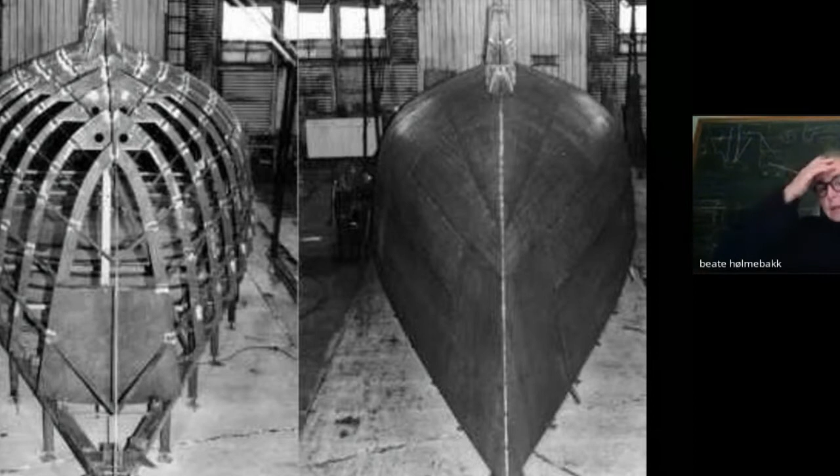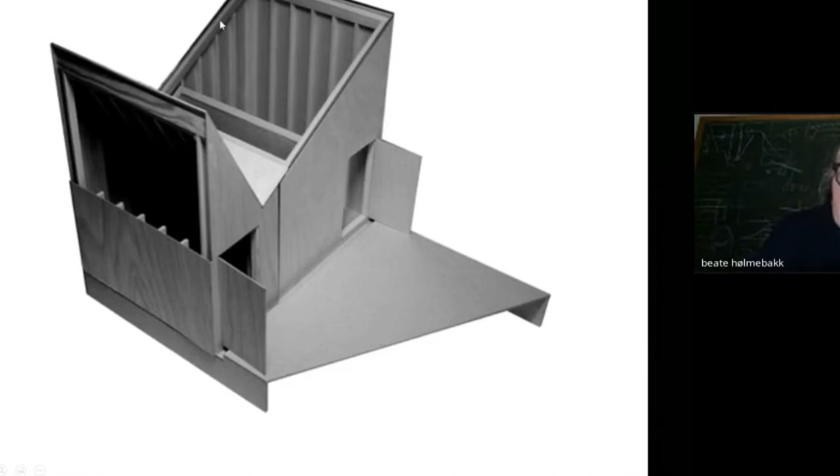We started out, as you probably saw in the sketch, with a concrete building. Then we found out there were lots of shipyards nearby, in the towns near the site. We thought we should rather make it locally and have it produced by a local shipyard, more or less like a boat structure. So we developed the concept and came up with the idea of a steel structure clad in corten steel.

It's an incredibly simple plan. It's a large toilet for handicapped people, a small service room, and a smaller toilet. And as you can see, there's a skylight and a very high set window.

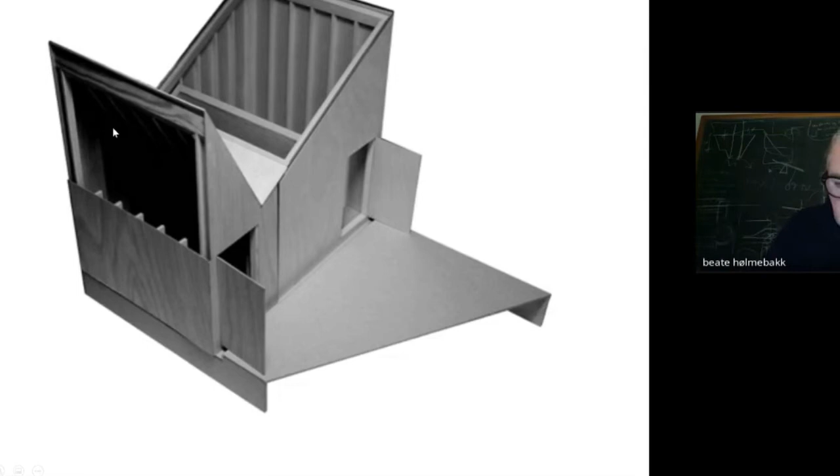Then we started to look into the steel structure and understood that actually we didn't need an interior skin. We could work with a load-bearing skin of 8 and 10 millimeter steel and only have some bracing where it was needed. This building is closed during the winter, so it really didn't need anything else but this thin steel structure.

So it was made in the shipyard. Every piece was made and then brought to the site and welded together.

We enjoyed very much working on the detail of this project. For instance, the openings - of course these could be rectangular. We needed a flange to lay the glass on, but we really wanted to form the opening so they weren't regular windows. So we started to modulate the steel into something a little different than the most obvious shapes. We designed the doors, the hinges, literally everything.

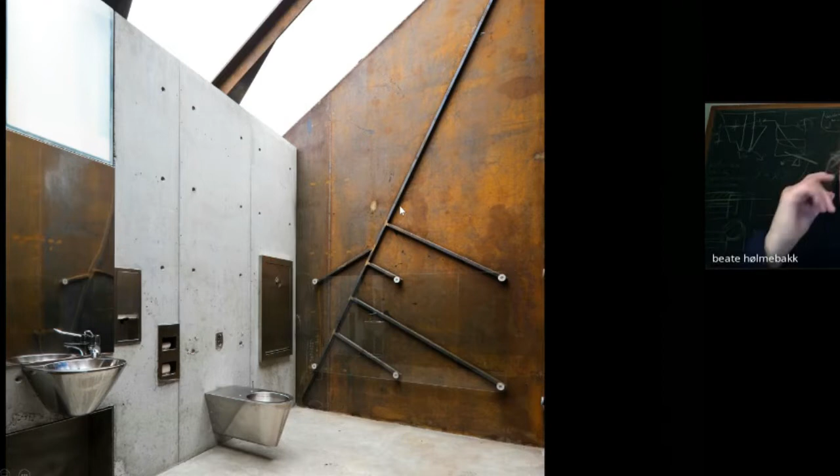I think we are an office that is very interested in details, but we are not interested in slick details. We like very much that you can see how things are produced, and that you can read from the building what the different parts or architectural elements actually do.

In the middle of the building there are two concrete walls that stabilize the structure sideways, and that is used for hanging all the equipment. This is the small toilet room.

We lined the space with clear glass so that when you were inside this building, you wouldn't get stains from the rust onto your clothes. So this clear glass is sort of a lining.

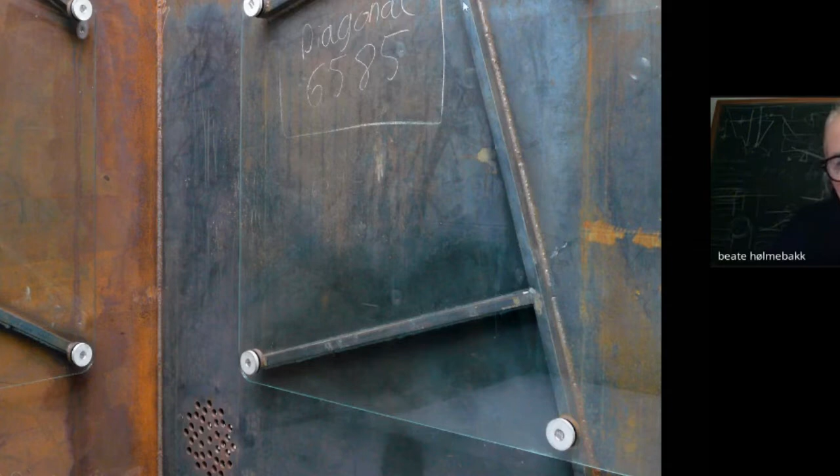Then we also saw that if you were sitting down in this space and looked straight up, if there was some glass up there, you would actually also see the horizon. So this glass became important in very many ways, both framing the notes the welders had written to each other, and also, inside this very close space, giving an impression of the horizon outside.

Another project, quite different, but also for the road ministry. This is a ferry stop. As you can see, traveling by car along the coast is a very tedious affair - you have to use a lot of ferries to get from one part of the land to the other. Especially during the summer months, when there are lots of tourists, you spend a lot of time waiting for ferries.

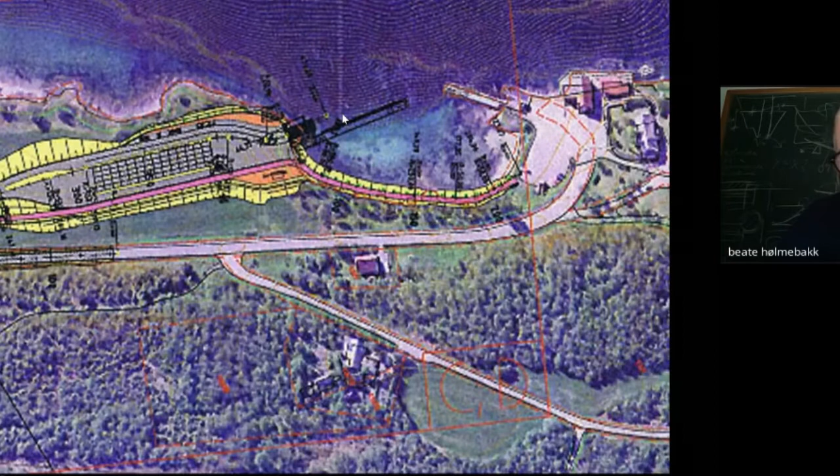Here is the plan that the road ministry made. The building shown in the former picture is a small hotel, restaurant and cafe, and they were quite dependent on getting guests from the ferry. They were worried that when the ferry stop moved to the other side of the bay, they would lose their customers.

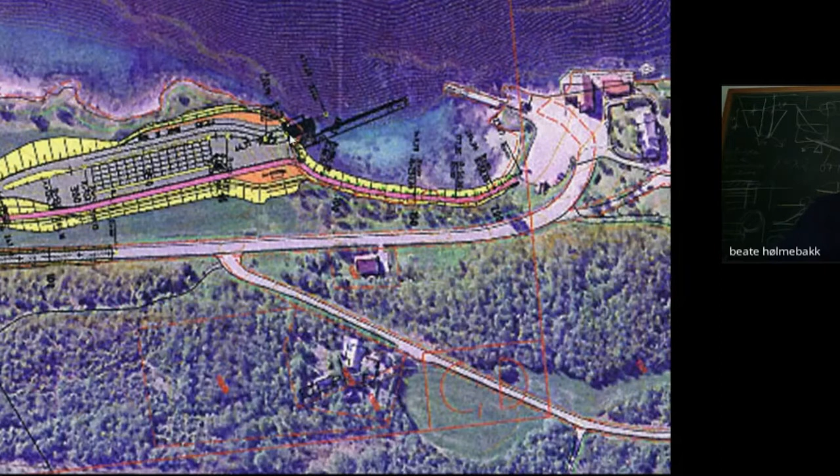We got quite worried when we saw this plan made by the road people, because it really ruined a lot of the coastal terrain. It was a very large parking space with ditches and landfills, and they blasted away some of the site to make space for a little service building.

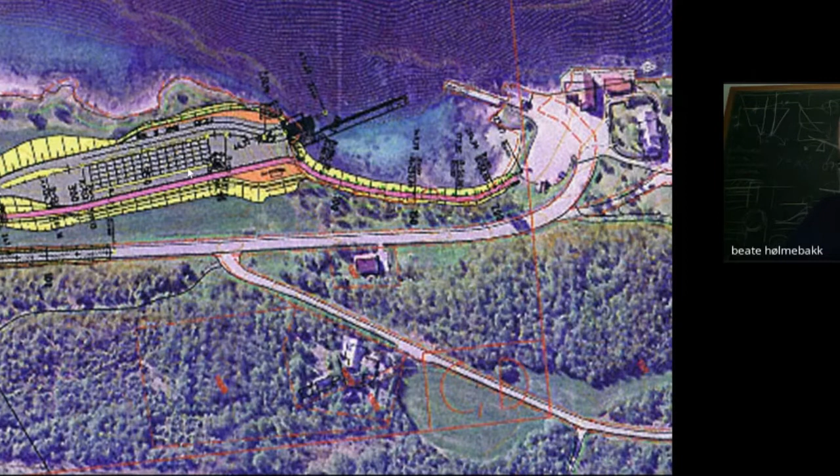Initially we were asked to design this service building, but we said we needed to make a better site plan that takes more care of the terrain. So we developed a different plan, quite a bit narrower than the original, with less dynamite and less blasting. We managed to secure some of the coastline, and also moved the service building down to the very end of the parking space.

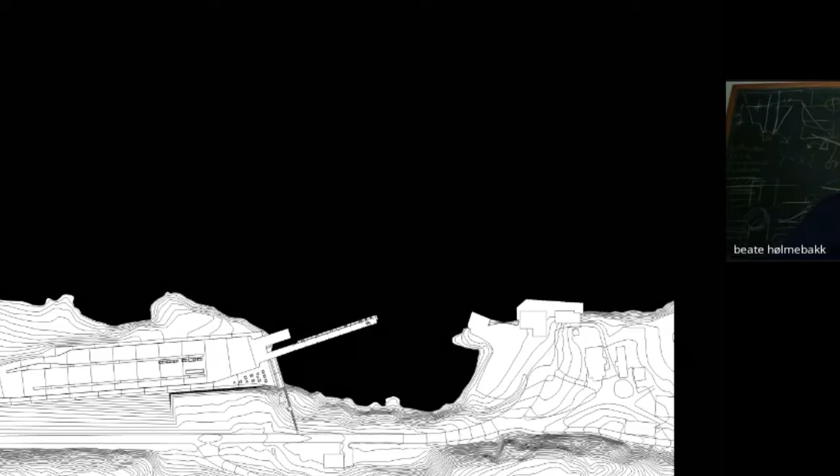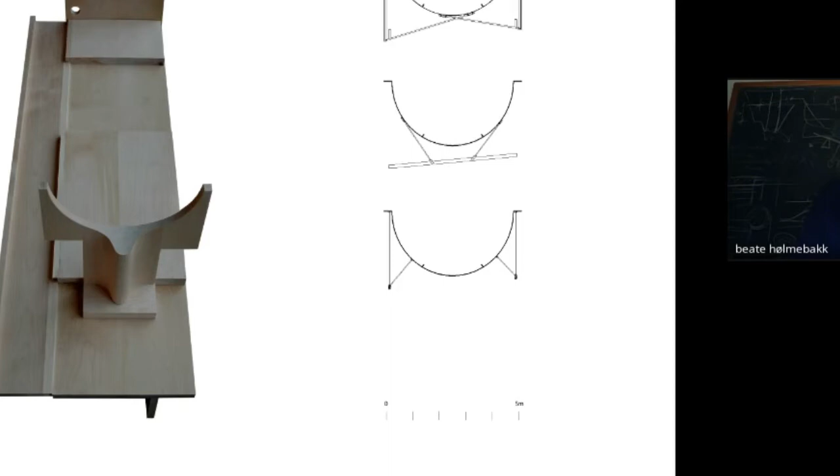What I will show now is this small building which is here. We had the idea that the building could do many things. The spatial program was simple: it should contain a kiosk, a waiting room and toilets, and also have some covered outdoor area for those waiting for the boat.

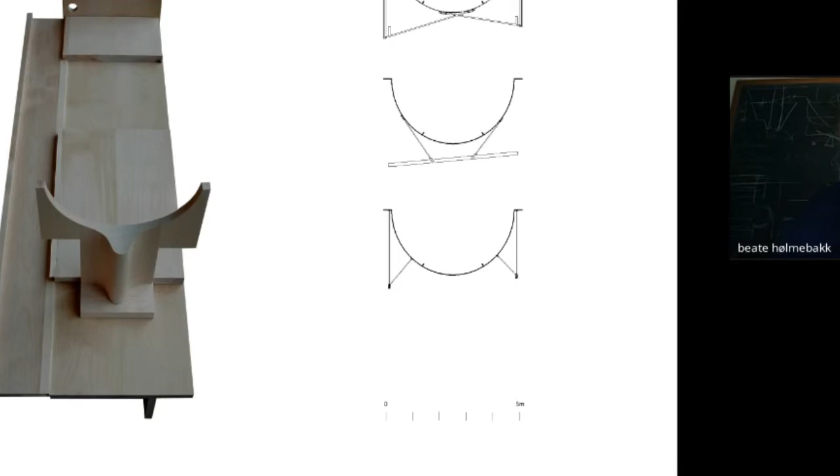This was a very big contract for the entrepreneur, but the main contract was really about groundwork - those who got the job were used to building roads and traffic systems, not buildings. We thought it was important to design a building that was mostly prefabricated and only mounted together on site, which would make it easier for the contractors.

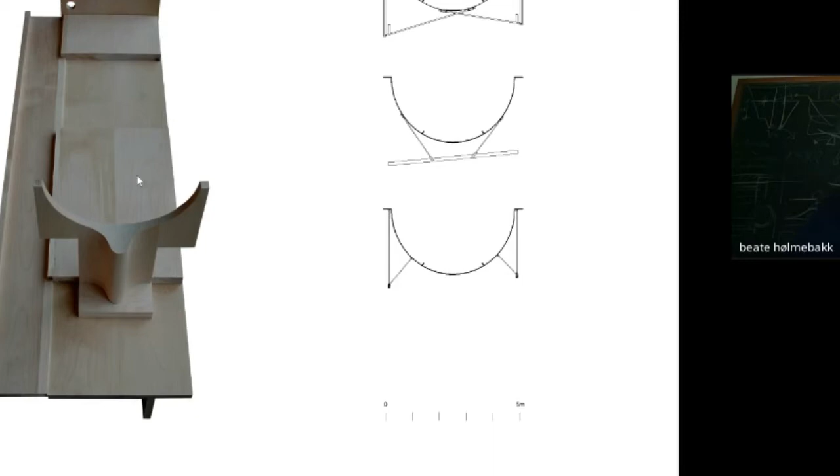So we decided to make a building with some criteria: it should be prefabricated, it should work almost as a spoiler, almost as a gate you could look through over to the cafe building on the other side of the bay, and it should somehow be relevant on the site. We had this vague idea that the structure could evoke ideas of the sea.

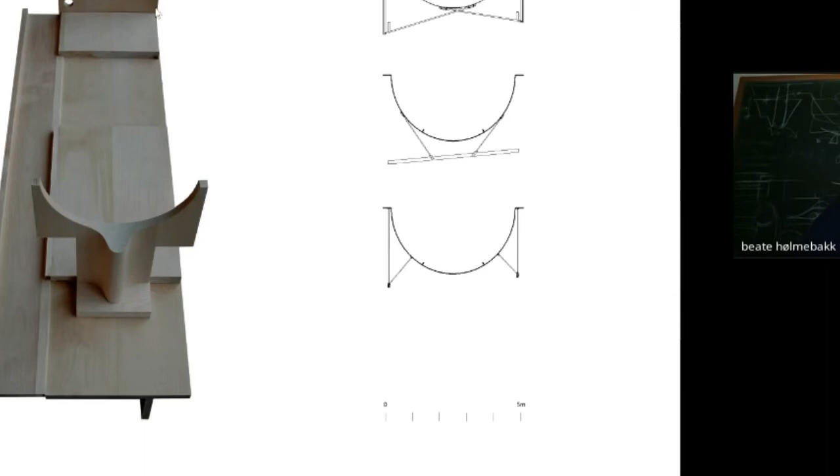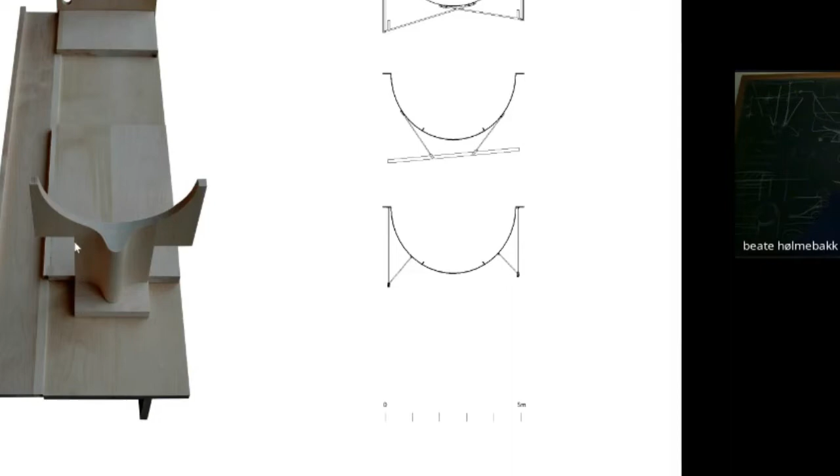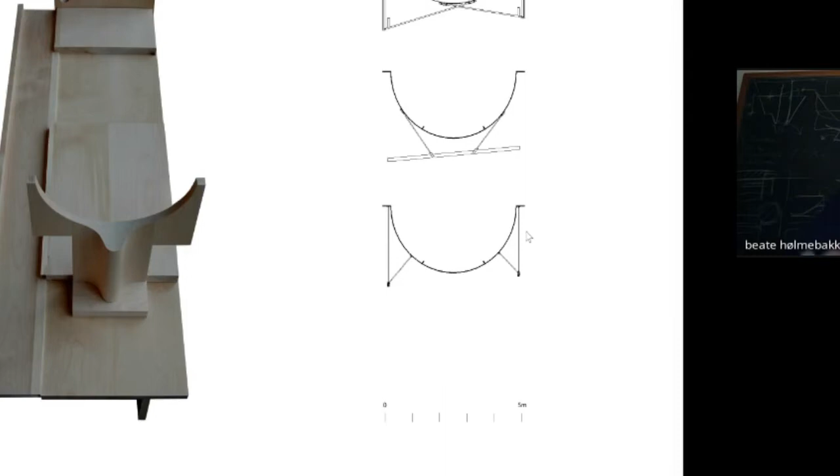We designed a building with two parts of the structure cast on site - two gable walls, one quite straight and one given a bit more mass to stabilize the structure. Onto these two walls we made an inverted steel vault that could span from one wall to the other and cantilever out to create a covered area. The main structure was this steel vault, very thin - 10 millimeters - that supported the building underneath and created a characteristic form.

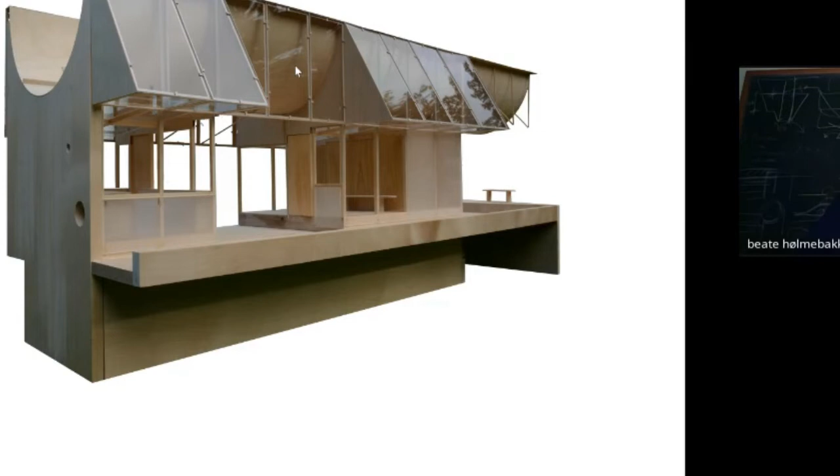Here's a model of the building. It became important to us that the building was transparent, so you could see through it, not only across the bay but also onto every part of the building. We were quite fascinated by this large belly hanging over every room, and we wanted it to be seen from every room.

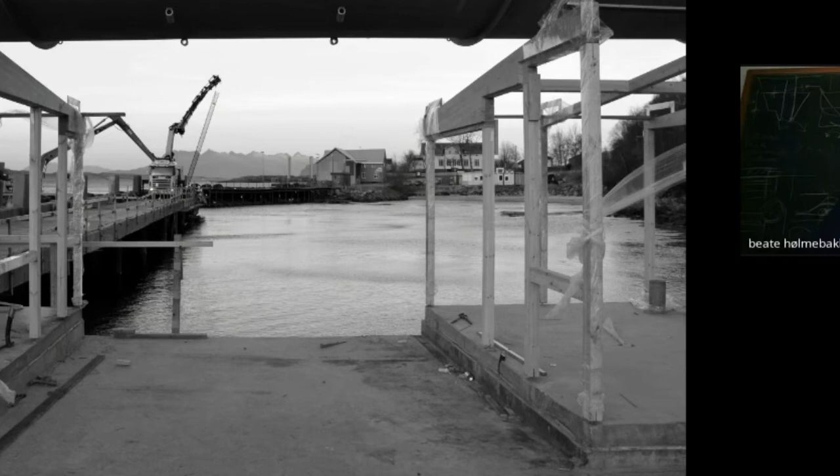Much of the project had to do with solving the details for making a transparent building. What the vault did was also stabilize a quite slender wooden structure underneath, which was then covered in insulated glass, so that these spaces underneath were warm throughout the year.

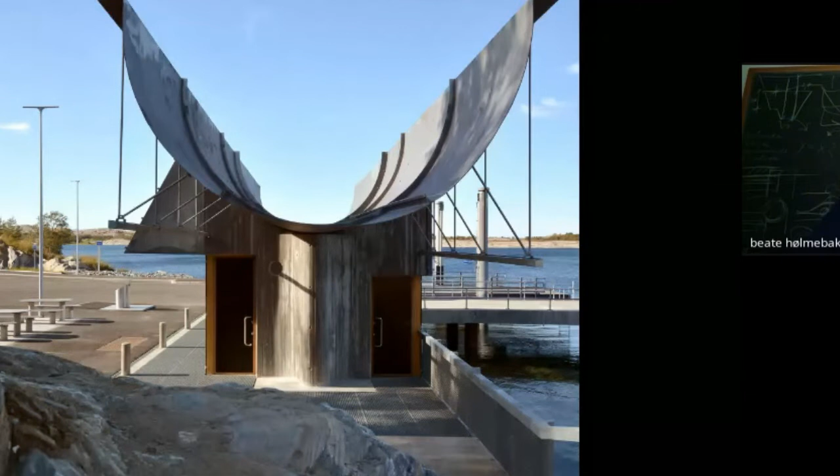Here's an image of the final project. You can see this idea of looking through, seeing everything and reflecting the site is a strong characteristic of the building. We also used this vault as a sort of armature that reflected the light during the long dark nights characteristic of the northern part of Norway.

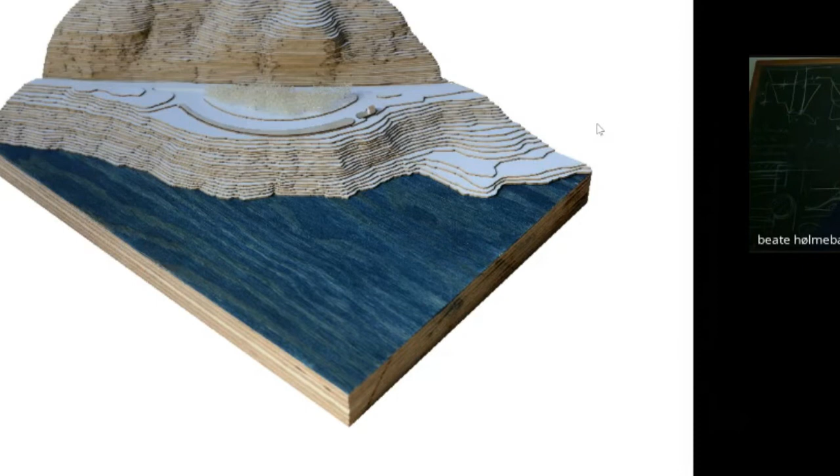There was a big landfill, waste material from the road construction, and on top of that landfill there was an old rest area in quite bad shape, which we were asked to transform. Here you see a small model of the site. We suggested making a platform from where you could look onto the large sound, and where you could sit down and drink your coffee or eat your meal. It was sheltered from the road by this planted area.

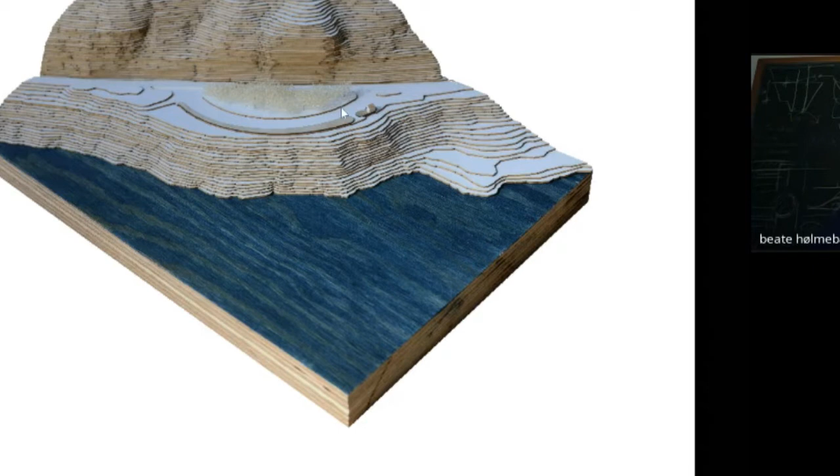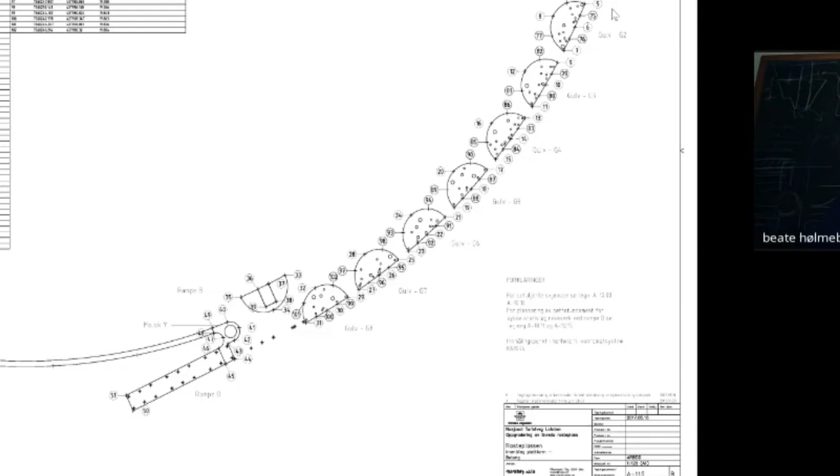What you see here, what is white is actually asphalt, and what is black is either steel or concrete. Here you see the foundations of what became the most important part of the project, and that was the furniture, where you were going to sit down and drink your coffee. You recognize the form of the platform, so these are concrete foundations for different kinds of furniture. I will get back to that.

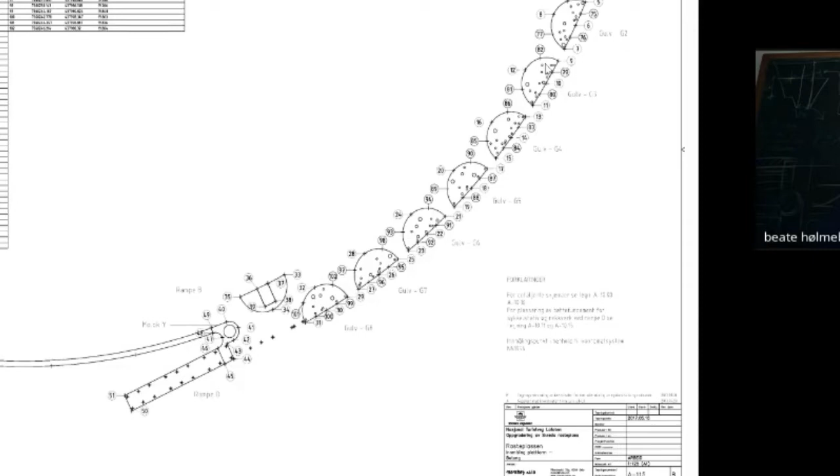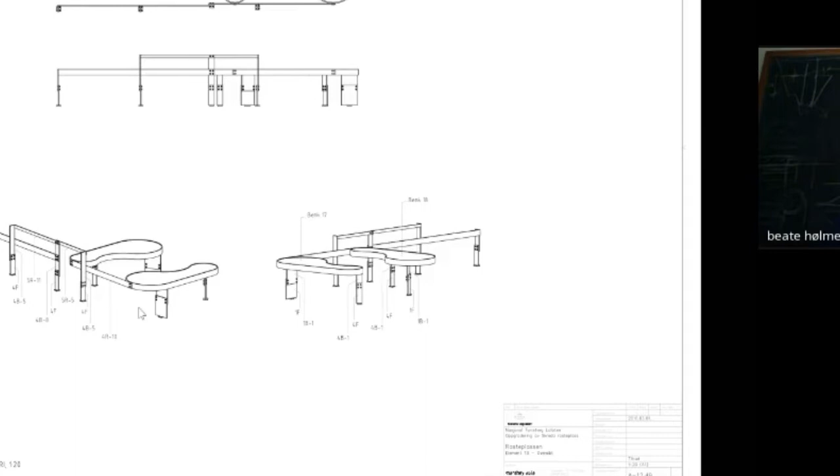We spent some time developing this furniture. It was important for us that it could be made from standard flat steel that just could be formed and given different shapes. And it was also important to us that the furniture and the railing, which was necessary for preventing people from falling into the water, should be one constructive system. That meant one couldn't remove the furniture without reducing the capacity of the railing, and vice versa.

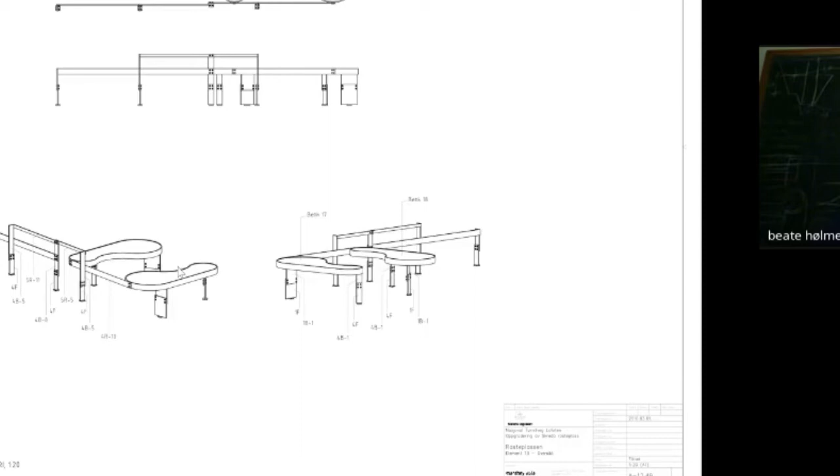So we developed several of these forms that were both benches and tables. And then we started to work with how these pieces of furniture could be given character, and how they could be covered with something that was not steel, because steel is of course quite cold to sit on.

So we had this idea of making steel troughs that could be filled with polyurethane, and given different colors. We started to look at the structure and the relationship between the railing and the furniture, and decided that each piece of furniture should only have two legs, with the last leg in the railing. So this is a small table, two legs and the last one. A large bench, two legs and the last one.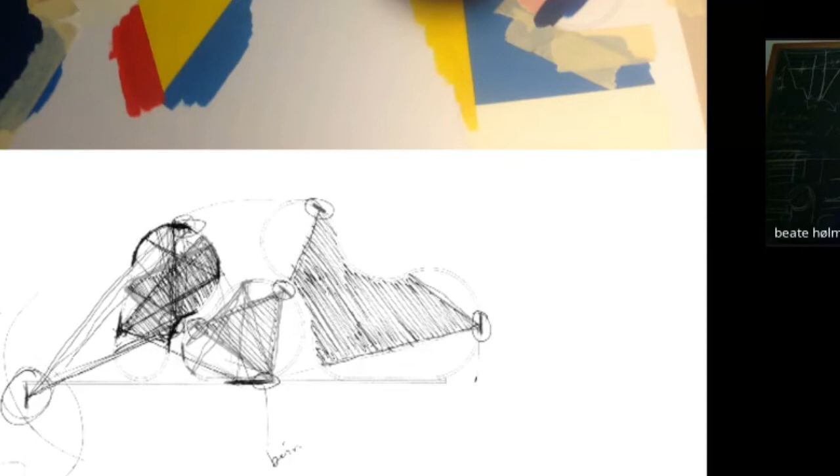Then we started to draw lines between the legs or the constructive parts, and we started to see a very interesting pattern emerging, developed between the relationship between the straight triangular lines of the supportive legs and the curved form of the furniture pieces. So we made models of these forms, and spent some time choosing colors.

So these are the semaphore colors, the colors used in a marine signal system. Here are I think 32 different benches and tables that have these patterns in these colors, and it's all generated from the idea of the relationship between the structure of the railing and the structure of the tables.

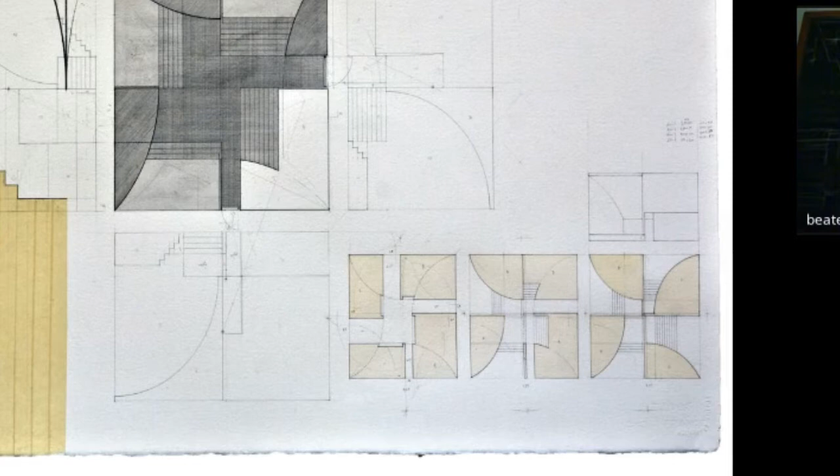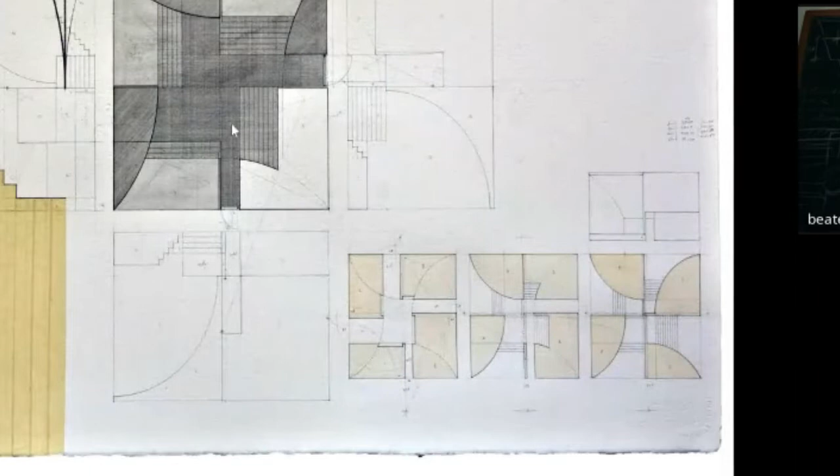So I'll go quickly through these 5 small projects. This is the first Icelandic one, building from G, and we believed that he must have been dreaming of fear and of freedom, and must have had a need to be in control. So we had this idea of a centralized space with 4 lookout platforms and a very sheltered space in the middle, with four escape routes in the 4 cardinal directions.

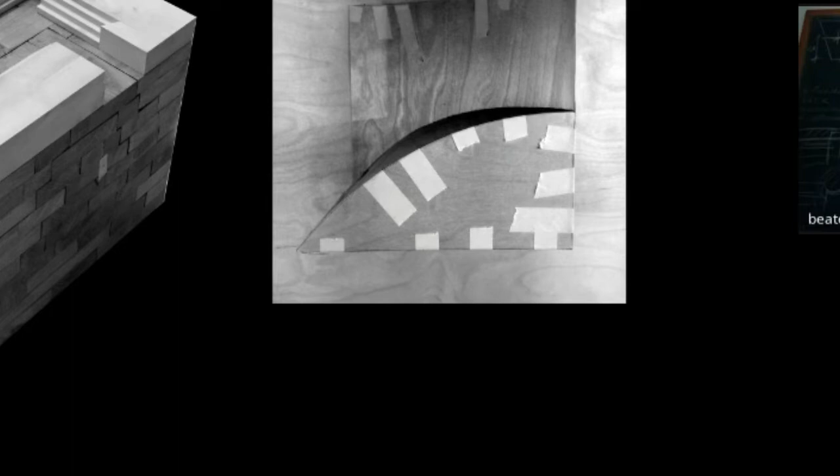So here is the site, 1 alin, the old Icelandic measurement. The model, the base of the model, where you see the escape routes, the platforms, this sheltered space in the middle, and these covered platforms.

Then it's building from M, the Irish cook. She was never sick herself, so she must have been dreaming of normality. And we guessed she must have had a concern about surface, because one could not see that she was a carrier of a deadly disease.

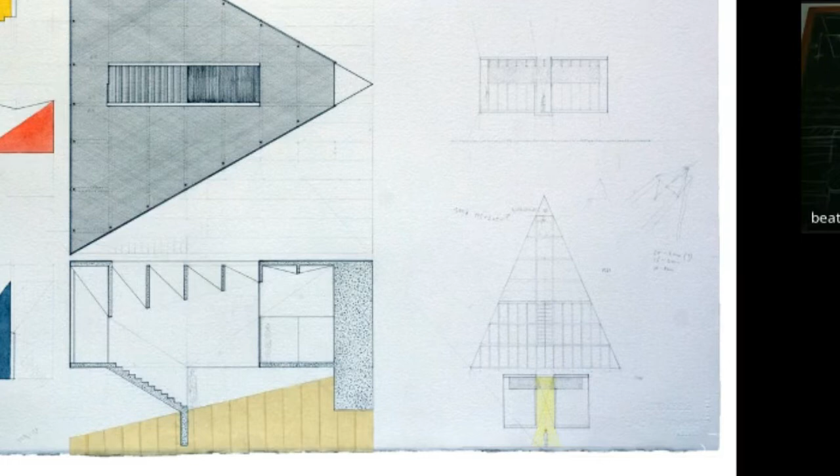So we had this idea of a structure which was all about establishing a horizontal plane on a tilted site. I will not go very much into each project, there's no time for that, but here we also started to work with color in order to think about surface appearance.

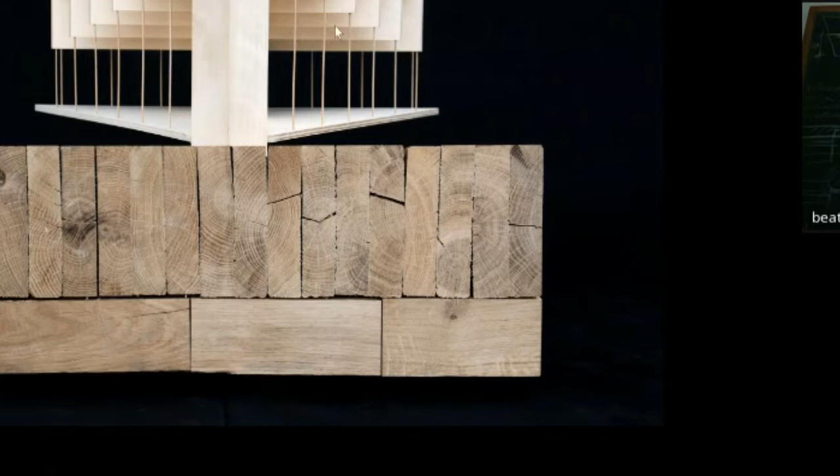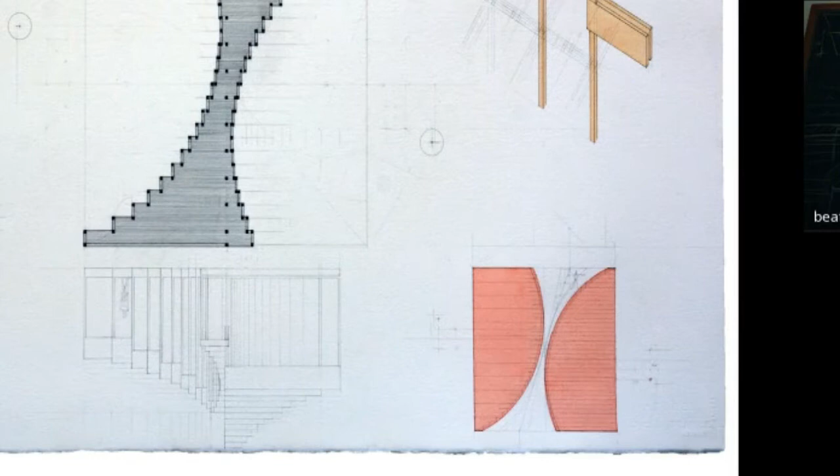Then it was building from P, Piotr Kamishevsky. We knew that when he was released, he was more than 90 years old, very, very old. He decided to stay on in the cell and stayed there for 5 years until he died. He had become a very religious man, and we believed he must have dreamt of friction, and also had a feeling of gratefulness.

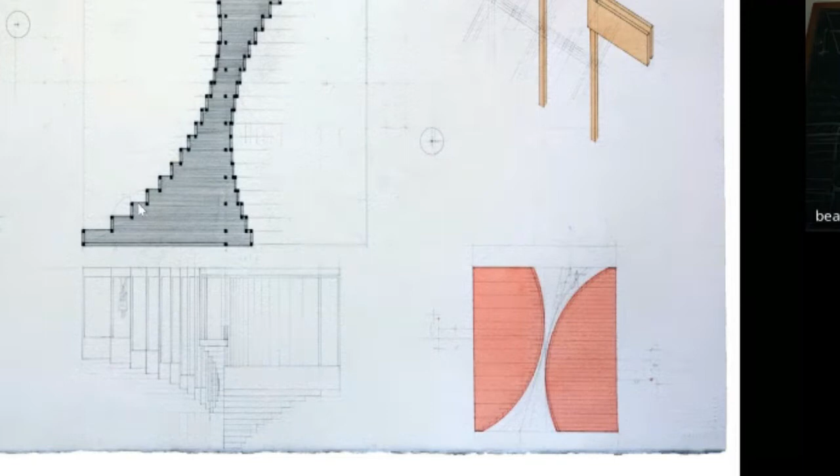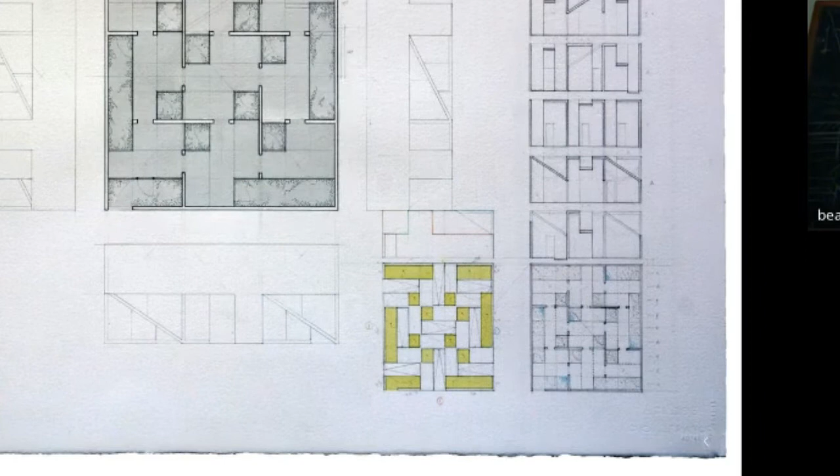Then it was building from J, the Native American. We think there must have been dreams of inclusion and persistence. The idea was to create a structure consisting of several spaces, based on the idea that the building itself could be a comfort to someone missing the company of the rest of the tribe. The site measures 1 cubit squared, some images, and then this very simple geometric structure, which creates quite complex spatiality inside.

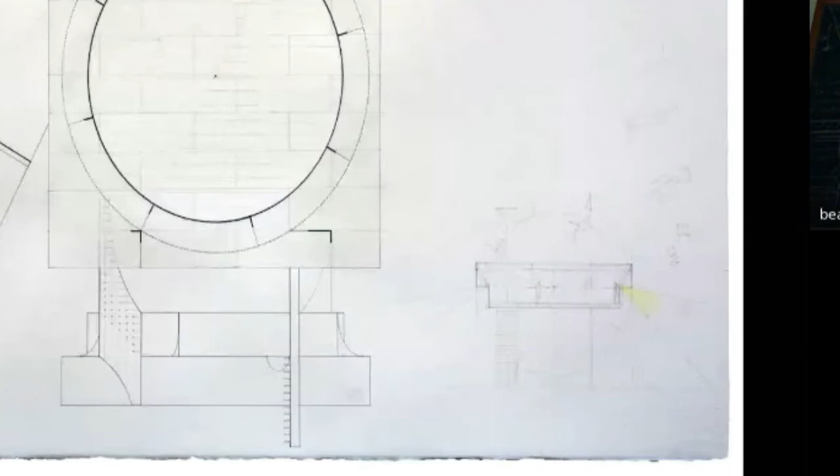And then the last one, building from L, the Dutch sailor. We believe there must have been dreams of acceptance, understanding his situation, and the yearning to surrender. The site, we never decided whether it was on land or in the water. The project is a large circular space from where you can look out in all directions. You enter the space by climbing up one of the legs, and then continue up towards the roof. This is a model photo from the interior, showing the ladder coming up and continuing up towards the roof.

The roof is a large translucent membrane, and the idea is that you can walk out onto this soft membrane and end there. Okay, back to reality. This is a house which was just finished this summer.

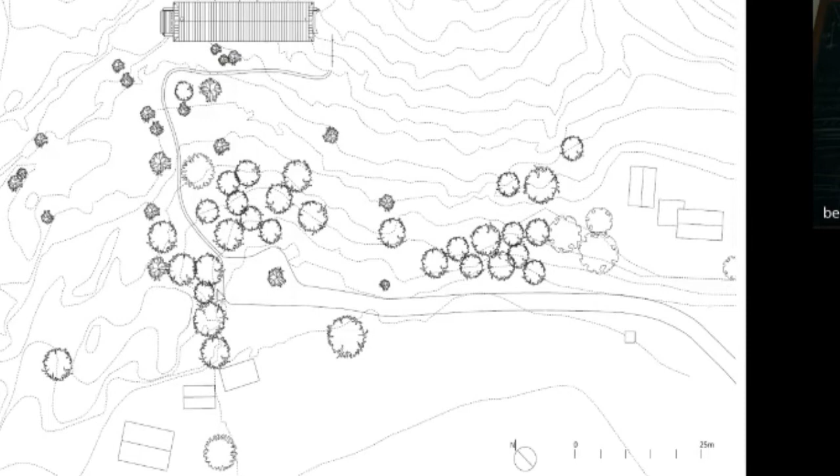It's not in Norway, it's in Sweden, a little ways outside the Norwegian border. It is a large natural site, quite beautiful, with a lot of visible bedrock. So many people would probably say it's not a very pleasant or inviting site.

We think it's absolutely beautiful, but it's hard to move from floor to floor. These bedrock plateaus make quite usable outdoor floors, but it's hard to walk from one place to another. So we decided the best thing would be to build a building that spans from one plateau to another, connecting these parts of the site. By building a bridge, one could also have a construction site without ruining any of the existing terrain.

The normal thing to do, at least where I am, is to move in with dynamite or landfills or large machines that result in very big changes to existing qualities. We tend to think that when you have a commission, the site is maybe the most important resource you have to deal with—more important than the client's budget or the program—and it's really about the existing conditions and how we as architects manage to make use of and enhance these qualities that are important for the result.

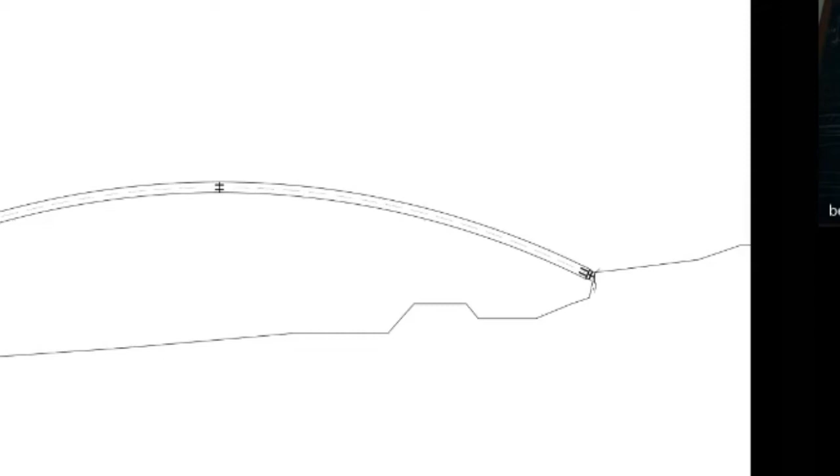We understood early that it had to be a timber structure, because timber was the only thing light enough to be carried or transported to the site. The span is 29.7 meters, quite a long span. Here are the two arches that carry the whole house. Each of the 4 foot points are different, and the whole point with the surveyor was to get complete control over these points.

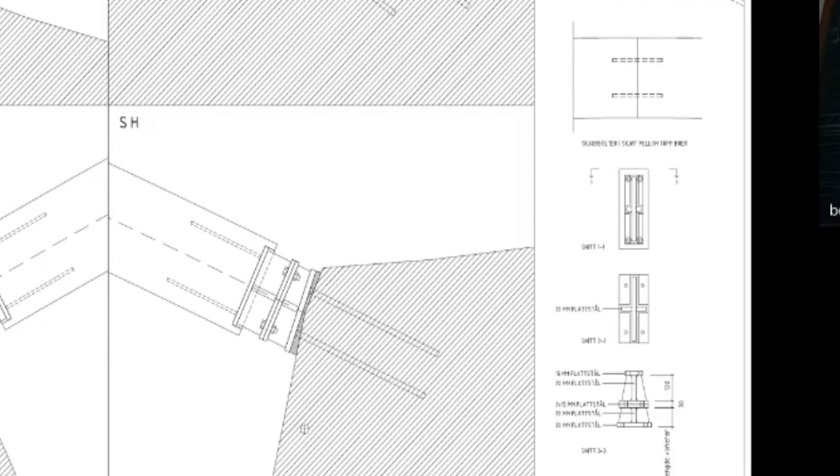What we started with, after having control, was to drill holes in the existing granite, and holes made specifically for each of these 4 stainless steel brackets that were to be bolted onto the terrain. In order to do this right, we had to test with more handy material, like wood, to make sure we had complete control over these 4 points.

Because when these arches were coming, they were being transported in by helicopter. They had to be lifted down onto these brackets, and the fit had to be perfect. There was no possibility to change anything when this was going to happen.

So here is the section of the house where you see the house, and you see the arch that runs through the house and how it lands on these 4 points.

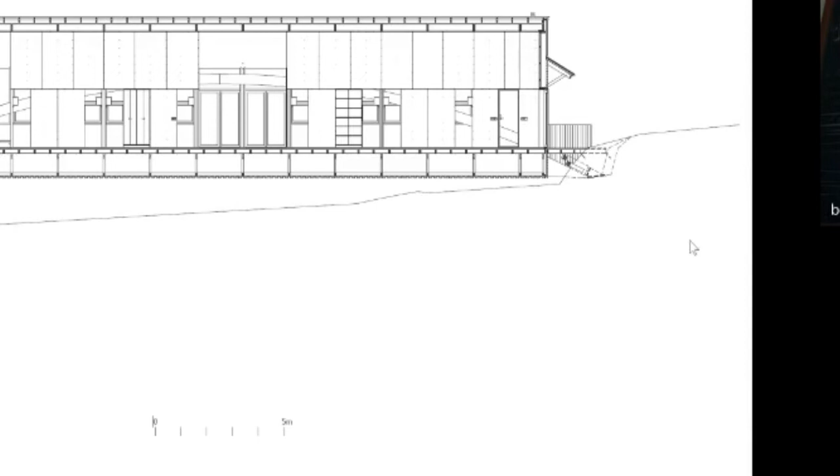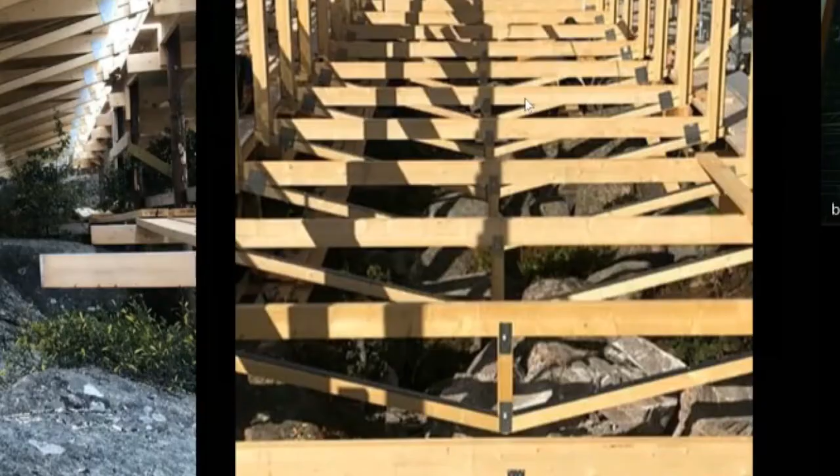Here you see the transport; each arch came in 2 parts, and each part fitted quite well onto the brackets. You see the underside of the building. The structure is such that there are hanging pillars mounted on the outside of each arch, and these trusses span between each pillar, creating this sort of keel-like underside of the house.

Here's another cross section where you see the bracing of the structure. There are of course lots of wind loads here, so the building had to be connected to the rock in the back to take both suction forces and pressure.

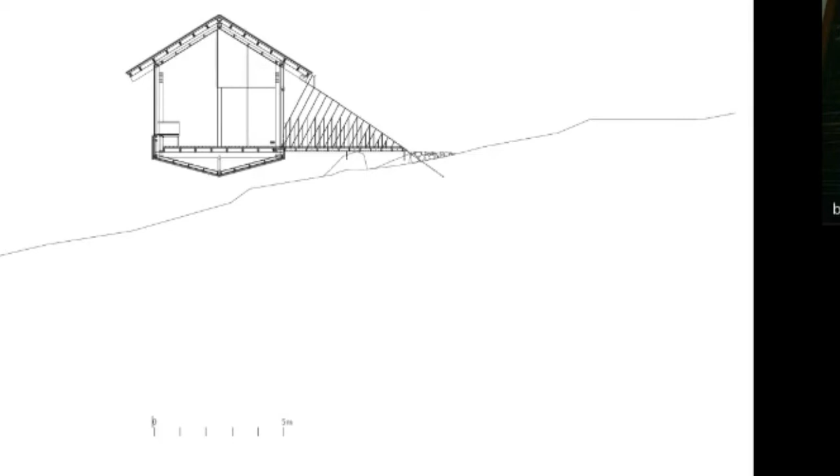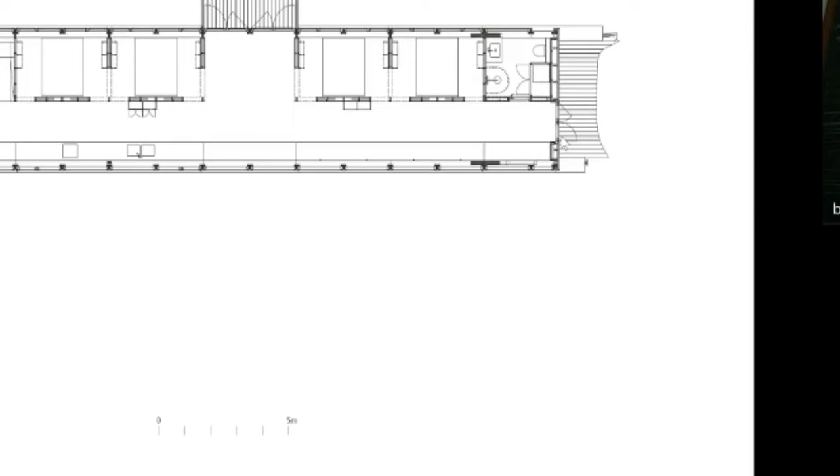Here you see the plan of the building. It's a very long interior space, 25 meters, with a central dining area, a living room, and 4 bedrooms, and then these connections to the different parts of the site.

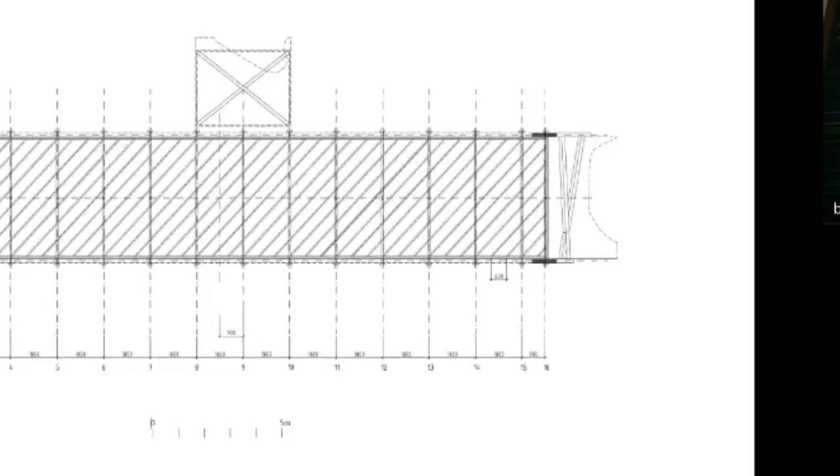It's hard to build in the air. The most logical thing is always to make a foundation and build upwards from there. Building something that's actually hanging in the air is more challenging, especially when it comes to stabilization. So this solution required some interesting geometries that made for interesting details when it came to building physics and static solutions.

Then to the last project. It is not finished yet, it's an ongoing project. It's a public commission for a national memorial at a place called Utøykaia.

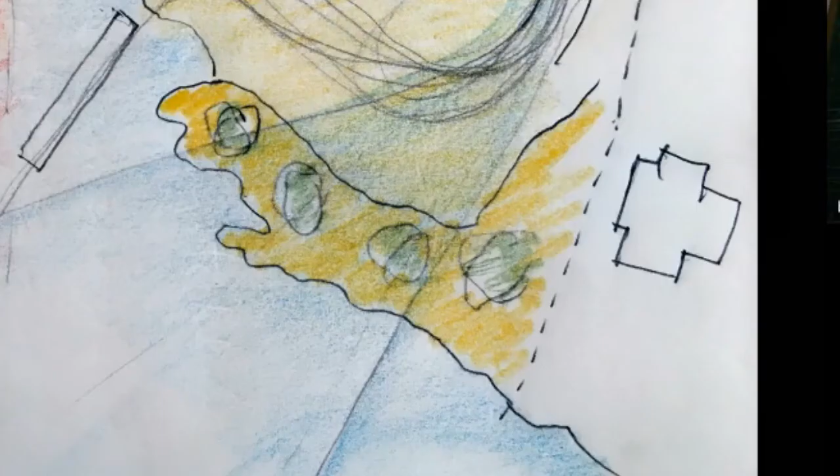It's a special area, where the neighbors do not want to be reminded of the incident, and where the neighbors are not so fond of the political activities out on the island. One thing that causes irritation is that buses transporting kids to the island stop on the road here and block it for the people living there.

One of our first sketches was a new entrance road, which would take you down to the level of the water at this end of the site, so that the end where the memorial was going to be could be much calmer, somehow the last moment on the site. If you were not going to the memorial, you could leave to the island, but if you were going to the memorial, you would be at the very end of the site.

We decided early that we wanted to come up with a form that would not have existed if it was not for this terror incident. So we started to look at the timeline and into the narrative.

The site is here, quite beautifully positioned. The island is right west of the site, and as the sun moves every day, it moves around like this, so this is a warm and sheltered place.

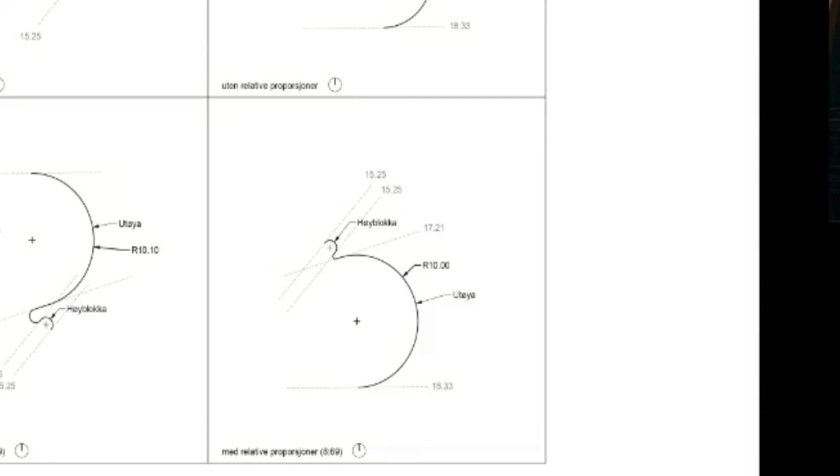We needed a long line because we wanted to line up 77 columns, one for each victim. Since the site was quite small, we had to compress the line, and these are studies of how this line of columns could be compressed.

So we ended up with this shape, creating one small space here, where at the moment the government quarters were bombed, there will be no shadow from the columns in this space. Likewise, when you are in this other space, there will be no shadows from the columns during the time the killings went on the island.

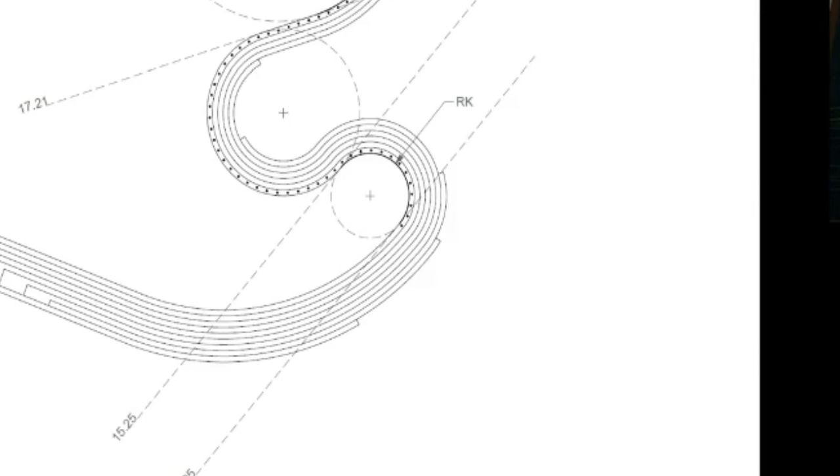These little dots are the columns. They rest on a stone stair that also works as a retaining wall, because we made the whole site into a large ramp so that everyone entering could easily come down to the water. We let the stair go out into the water, creating a sort of dock as a gesture to the locals who had boats and were very important during the rescue operation.

It is a large project. Here you see the road, the new entranceway — it's a 15 meter height difference from here down to the water, so this is a very large concrete structure. There's place for buses and many cars, technical rooms under the road, a dock for the island, a roof structure where you can wait for the boat, and then the memorial and the dock leading out to the water.

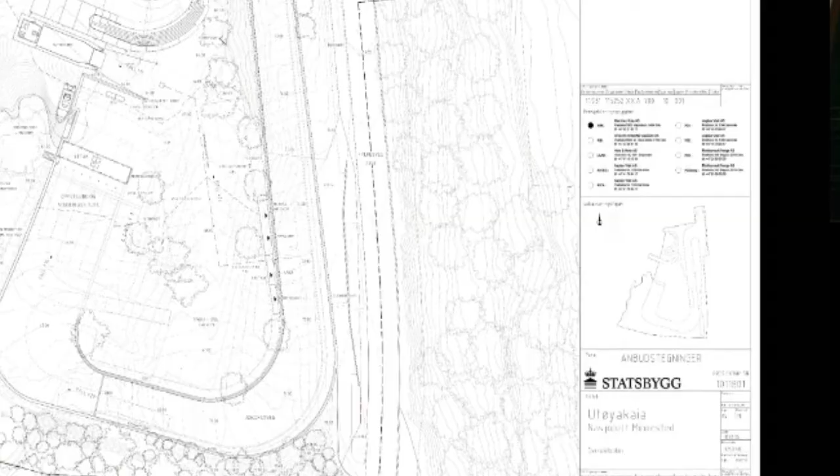This is the building site, what it looked like last week. It's really building from one edge of the site to the other, completely filling the site.

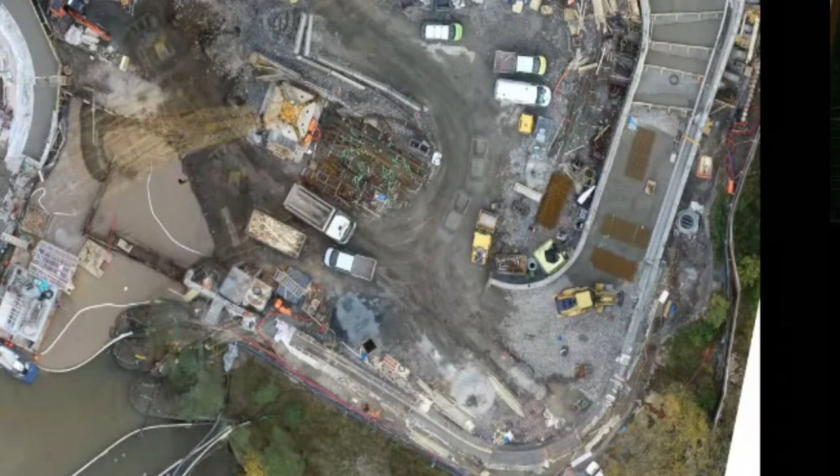There is some sheltered natural terrain, this promontory, which is going to be kept as it was. There's lots of challenging terrain — it's very deep down to bedrock at this end and right on bedrock at this end. This is drinking water, so the building process here needs to be monitored in every way.

But what I will say a little bit more about is the most important thing of this project, and that is the development of the columns.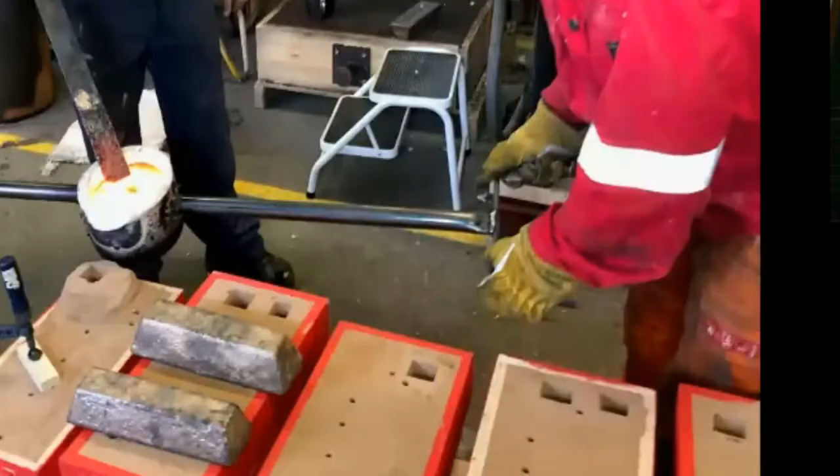They are cast in solid bronze. To begin with, we worked together with a factory which makes propellers for large ships on the western coast of Norway, and they helped us develop models at 1 to 10 scale.

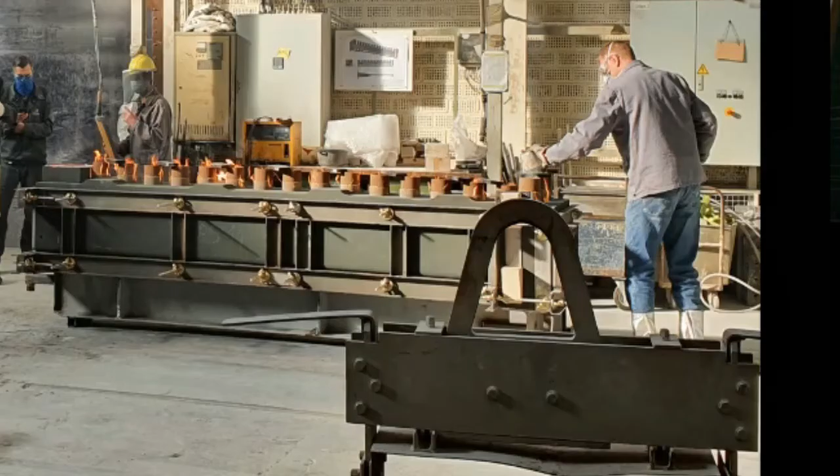We wanted each column to be different, and we were quite worried about how to make 77 different forms for casting that were big and expensive. So we wanted this sort of industrial process for the bronze work. However, we ended up working with a foundry in southern Germany.

This is the casting of one of the columns. They are all different, but they are of the same family — they all have this twist that makes the top of the column reflect the sun as it moves past the site.

What we think is fantastic with this bronze process is that it's a mixture between 3D modeling in machines and then heavy industry in the casting process, and then very fine craftsmanship when it comes to the finalization of each column.

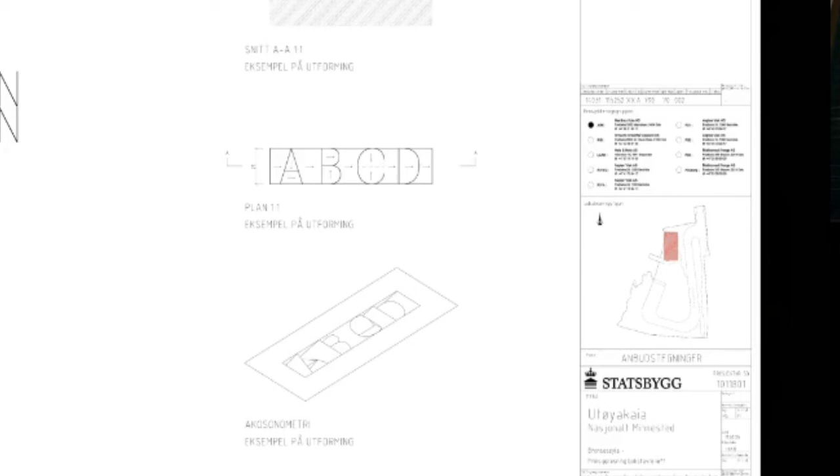The most important part is the names, each name of each victim that is being cast into the columns. We didn't want the names written with a regular alphabet - it would become too much of a name tag. So we developed each name as a small project, made of tilted surfaces that would reflect the light as the sun moved across the site.

So this is from the building process. This is actually early last week, where the columns have arrived on the site. Here they are - it's sort of hard to see. They are lifting down some of the first columns and placing them here.

You see the names. Two of the families did not want their kids' names on the columns, so they are blank. I think this is the last picture. And what I appreciate most about this project is the care and time and architectural work that has actually gone into each of these victims' names. Yeah, that was it.

Beate, thank you very much for your very impressive presentation, lecture, and finally this last project, which is a very moving one, when I can put it like this. I will now give the floor to our students to ask you some questions, but I would like to start with one observation or a question.